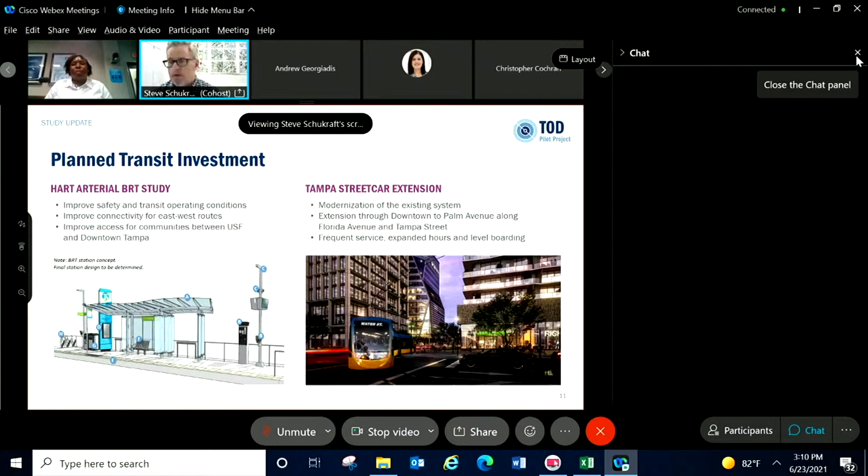So the fundamental question we're asking is, what does transit service mean for communities along the project corridor? When we talk about transit service, we're talking about two forms of transit service enhancement. One is the HART arterial BRT project, designed to improve the connection between downtown Tampa and USF by providing more frequent service, longer hours of service, and higher quality service along that corridor.

At the southern end of the corridor, in the core of downtown Tampa up to Tampa Heights, the transit overlaps with the arterial BRT and includes the Tampa Streetcar Extension project. The extension runs from the existing terminus at Fort Brooke Garage, north on Florida, south on Tampa, from Palm Avenue down to the existing system. So again, we're talking about frequent service, expanded hours, and high levels of accessibility to the system. This becomes, instead of a transit-served environment, really a transit-rich environment.

We're looking at and trying to understand better how to guide land use and development along that corridor. This map shows those locations. The yellow on the right-hand side is the existing streetcar line plus the extension up to Palm Avenue in Tampa Heights. The arterial BRT line is shown as the blue lines, with the circles indicating an early draft of the station location sites.

Running north on Florida, with the Tampa Pair south of Violet, and then Florida both directions up to Linebaugh, crossing to Nebraska, north on Nebraska to Fowler, east and west on Fowler to 30th, and then up to the VA, most likely with a turnaround at the University Area Transit Center. This stitches together the city's urban neighborhoods from downtown to Tampa Heights and Seminole Heights, to the older neighborhoods and commercial districts along North Florida, Nebraska, to Fowler Avenue, and to USF and the VA.

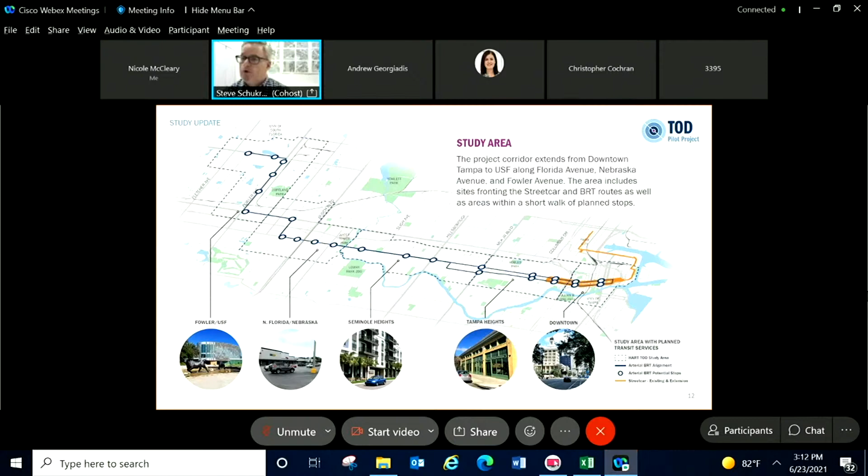And if you know what's happening up at the north end, there's a lot of development and investment in the pipeline, especially associated with the redevelopment of the University Mall site. The Rithm Project is going to completely transform the east end of Fowler, and we expect the market to improve significantly for similar kinds of more urban investments at the north end of the line.

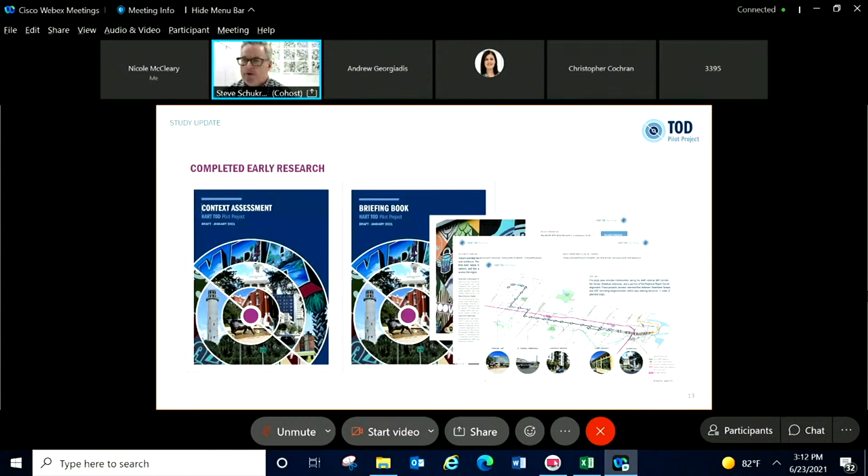So the research we've completed is a detailed context assessment looking at conditions along the full extent of the project corridor. Much of that is organized around reporting of conditions by sub-area, by the major neighborhoods I just talked about. We also have a briefing book, a summary document which rolls that up into a briefer statement about conditions along the project corridor and some of the key issues driving our thinking about policy and strategies.

And then the project shifts to Nebraska. Nebraska's conditions are somewhat similar to Tampa Heights and Seminole Heights. And then Fowler, we've got larger footprint commercial, some of that aging, some not performing terribly well and available for change. So if you think about it, we'll talk about the different kinds of opportunities: from urban infill downtown, to incremental infill and adaptive reuse in the center of the corridor, and then suburban retrofit as we move north, where we have more auto-oriented uses and larger footprint sites.

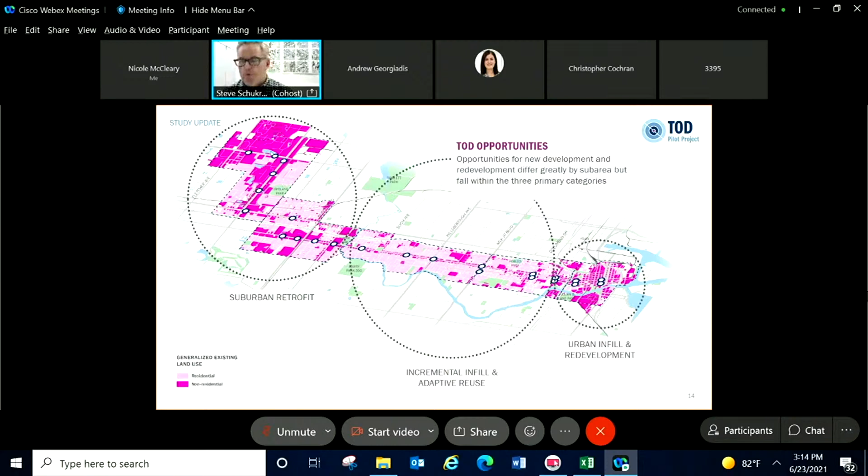So for the workshop, we went a little deeper into the existing conditions, but for today we wanted to get into the plan strategies. I'll present where we're headed with those around three big questions, and then open it up for discussion. We would like to spend the bulk of our time listening to you all.

So the three buckets of recommendations are organized around improving walking, biking, and access to transit, promoting housing affordability and diversity, and encouraging transit-oriented development and protecting neighborhood character.

So the first big question: how can we make it easier to walk and bike along the corridor and to transit stops? A transit trip begins and ends with a walk or bike trip, so walkability and bikeability is really fundamental to what we're thinking about.

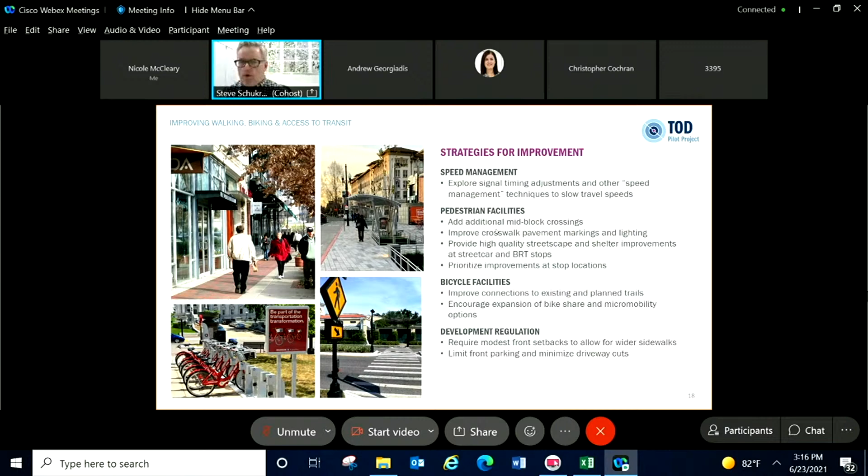On the affordable housing side of the equation, the question is, how can we protect existing housing affordability, encourage new affordable housing, and increase the diversity of housing options? So three basic dimensions to that question that we're focused on.

We're starting to develop a toolkit that describes the actions that would be appropriate. That's organized around five basic kinds of tools: housing programs, regulatory options, zoning tools, funding mechanisms, and capacity building. So we're starting to build out a set of recommendations around these basic ideas.

We've talked before on calls about the regulatory tools to streamline review processes, provide some regulatory relief in terms of limited parking, and also the potential for density bonuses to help support affordability. So that's just one of the five sets of recommendations we're focused on delivering.

And then the second part of that is the diversity of housing offered in the market that could be affordable or market rate. Right now, the market's delivering the two ends of the spectrum: single-family homes and larger scale apartments.

But there's a lot of missing middle housing types that aren't being delivered in the market, and we're trying to look at both what's driving that, what may be driving against delivering more diverse types, and if we can develop regulatory tools to try to promote that housing close to the corridor. So we're dealing with this from both an affordability and a diversity perspective in terms of housing.

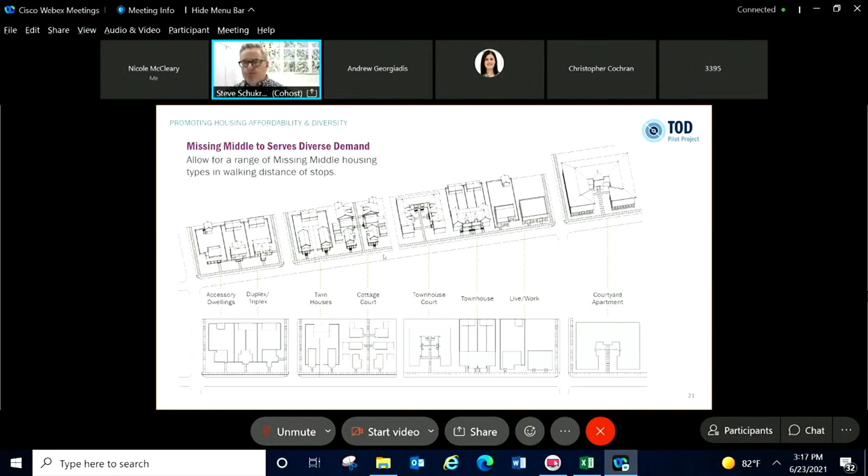The bulk of this presentation is going to be about encouraging transit-oriented development and protecting neighborhood character. So the big question is, how can we encourage development of underused and auto-oriented sites, bring new uses to the corridor, and ensure projects fit the surrounding community?

That project fit question is an important question because we've got single-family neighborhoods at various levels of stability right up against the project corridor, and we want to be really careful that what we do along the corridor supports goals for neighborhood stability, conservation, and improvement.

So the basic structure of the recommendations is organized around the definition of place types. Think of these as your future land use categories, a kind of replacement future land use category set - these would be the primary tools to guide development and redevelopment. They provide the foundation for comprehensive plan policies and eventually future zoning standards, including guidance about land use, but also about form, scale, and quality of development.

And we're thinking really carefully about how development along the corridor relates to the surrounding communities - thinking about transitions and buffers and scaling back what occurs up against the adjacent single-family communities.

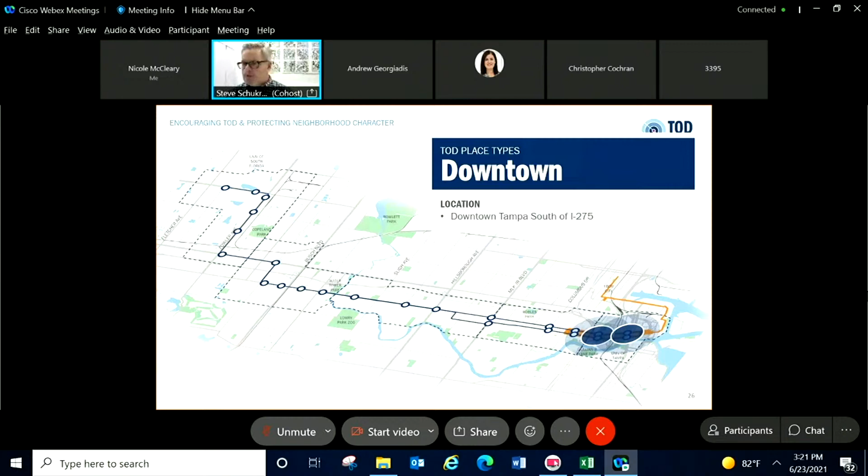So the first, downtown. This is a very small footprint affected by this recommendation. Downtown is already covered by zoning categories that have been improved over the last several years to address questions about frontage, orientation, and ground level use, and the Downtown Partnership and the city have been working on parking reform to make it easier to deliver more urban projects with less parking. So downtown somewhat takes care of itself, but we do need to look at how we can improve the existing regulatory framework to help make sure development supports transit in the best way possible.

Downtown is the most transit-rich place in the region. It has the ability to support significant intensification of use. If you think about downtown, the street network is basically set, so there's not going to be more roadway capacity, but there are better ways to use that roadway capacity or street space to move people, and that's through the delivery of enhanced transit options, which is what the streetcar project and arterial BRT project are all about.

Downtown is a place with tall buildings, primarily served by structured parking, active storefronts and streetscapes, and the city has made significant investment over the last several years to improve walkability and streetscape conditions.

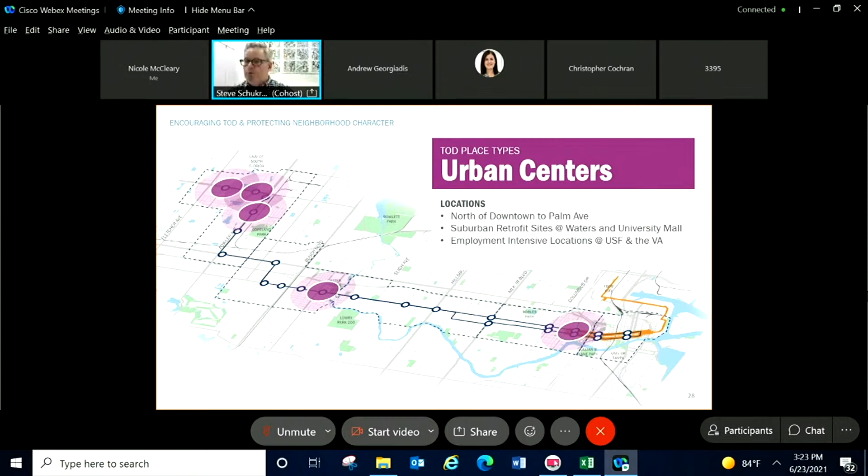These categories would allow for a broader range of uses if the institutions wish to go that way, but the idea is that there are just a few pulse points of more intense activity in a couple of locations.

What we're talking about here are mid-rise buildings with active ground floor uses. These would be community centers or sub-regional centers for commercial activity, higher density housing, education, and employment. We see these as being very urban in form, with buildings lining the perimeter of blocks, parking tucked in the middle, and a real focus on active ground floor uses and active streetscapes.

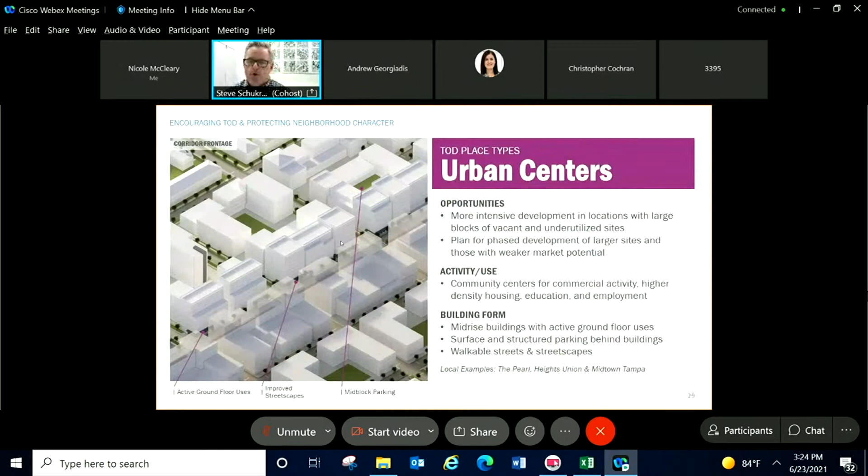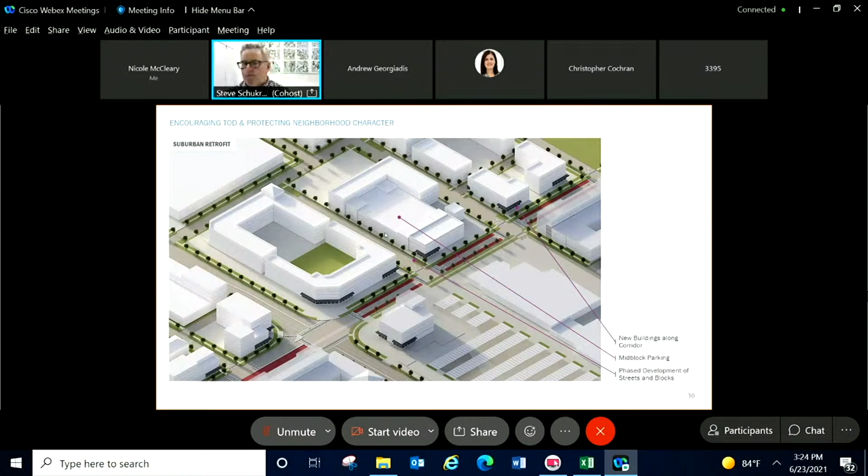This sketch shows a general location along the corridor: North Florida Avenue, north of the river. This imagines those large footprint retail sites starting to redevelop in a more urban and walkable form. We're starting to think about how improvements on those sites could be phased, how early phasing could be more walkable and more transit supportive, and allow for build-out over time of a more urban pattern of development. The character of urban centers is like you'd see in any good quality walkable urban environment.

The focus is on developing code recommendations and plan recommendations centered on the quality of the ground floor frontage of those buildings, lining quality streets and public spaces.

The TOD centers are the next scale down, and it's a bit of what's emerging in a few locations along the corridor now. If you think about what's happening south of Hillsborough Avenue on Florida, that's kind of emerging as a neighborhood center of activity.

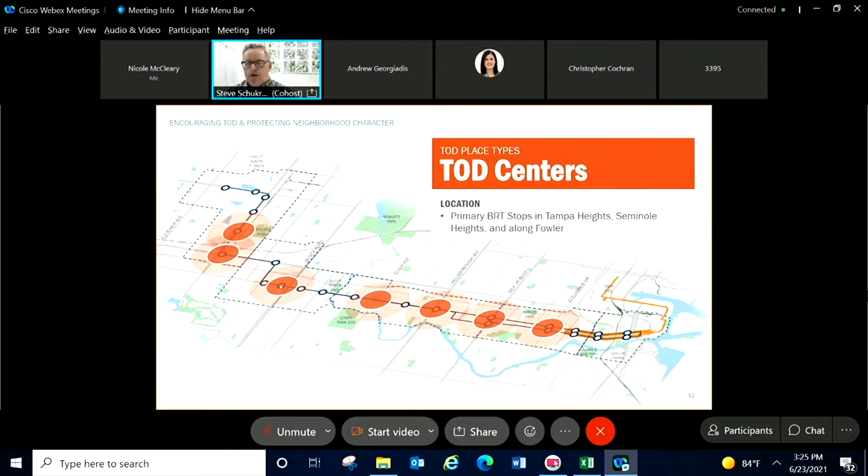There's been a couple projects that represent the general scale of development that we believe is appropriate for key locations along the corridor. So we're talking generally about the vicinity of Columbus, the crossings of Columbus, MLK, Hillsborough, Sligh, north of Busch Boulevard—this could be the potential redevelopment of the Floriland Mall site—and then at Nebraska, Fowler, and at 15th and Fowler.

So these are 3 to 5 story buildings, relatively dense, but not nearly the scale or footprint of what you would see in the downtown or urban center place.

The scale of that development is going to be influenced by the scale of sites available for redevelopment, so there's sort of a natural lid on how large these developments could be. We're also looking at transitional development that tapers down to the neighborhoods, so the introduction of missing middle housing types adjacent to the single-family neighborhoods off the corridor.

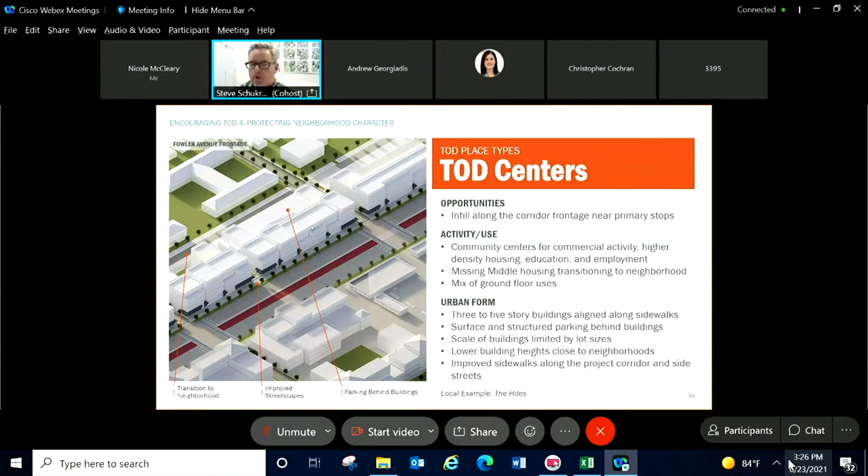The TOD center kind of development, like all of what we're talking about, really focuses on delivering quality streetscapes and public spaces, very walkable environments, easy to get to from the neighborhood, delivering additional alternative kinds of housing to support demand along the project corridor.

Really thinking carefully about how we get better streetscape conditions. This is The Hites—one of the patches of frontage along the Florida corridor—where we've got an example of how you can improve streetscape conditions with a relatively modest building setback and the right rules in place to guide design decisions.

The TOD corridors are the locations between the centers, and so this is a slightly smaller scale of development, up to 4 stories, still allowing for a mix of uses, still addressing the transition back to surrounding neighborhoods.

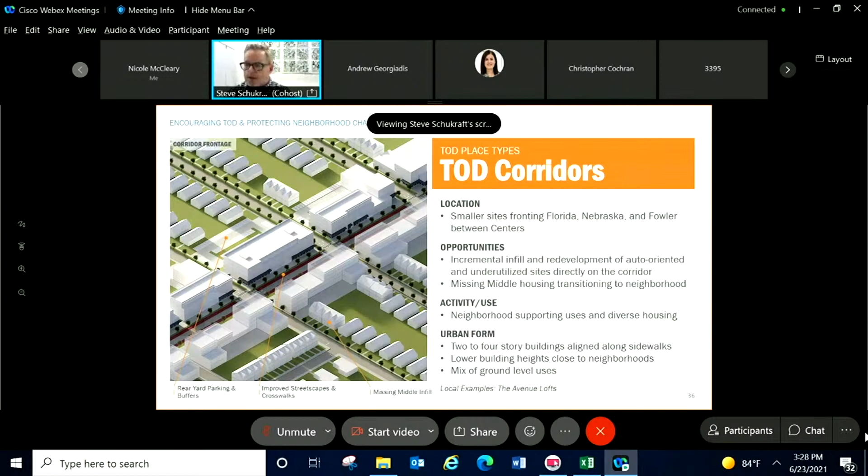The scale is more neighborhood scale, 2 to 4 story building types, with very similar conditions on the streetscape as across the corridor. So walkability is a fundamental goal for each of the types, and recommendations will address that in the comprehensive plan recommendations as well as in code recommendations.

And in the neighborhoods, we're talking about fairly modest scale infill and redevelopment close to the corridor that would introduce some new housing types, either small lot single family, some attached housing, and possibly small apartments.

I know there's sensitivity about the appropriate level of change in the surrounding neighborhoods, and so we would expect to get some dialogue going about this pretty soon. But the idea is that where we're delivering this enhanced transit, we can also promote neighborhood stability with the introduction of some additional types of housing to increase diversity.

So this is the structure that we're starting to advance the details of. We're starting to map the locations of these more carefully—developing a map set now that shows exactly how far, parcel by parcel, block by block, each of these designations goes, and how that relates to the surrounding neighborhoods. You'll be able to see specifically when we release those maps in the next few weeks how we're mapping this category and how that can influence the development pattern.

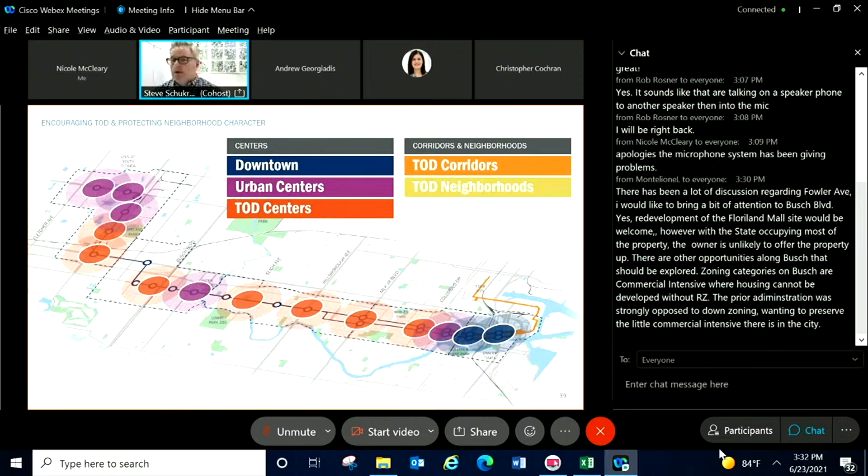The Floriland Mall site represents other challenges too. Portions of that have been sold off, so it's not just in the state's hands, there's private ownership of that whole parcel as well. One of the problems with mall sites is they tend to sell off the boxes over time, and ownership gets fragmented.

I think there's a fair debate about where to focus. Our sense is that the Floriland Mall site is not performing as strongly as the big box to the south, so we thought that would be the more appropriate place to identify a center. We don't believe that's going to happen anytime soon, the market isn't very strong right there to drive significant investment. We think there's other sites that are going to capture investment sooner than that.

The other thing is that commercial intensive category, we wouldn't consider adding the potential for residential development as a downzoning, we think that's providing more opportunities for change of those properties over time. So what we're trying to do is open up the possibility for these places that are specifically aligned with transit service, because both population and employment intensity is important to build the base of ridership and help justify and support the investment. We don't necessarily favor employment intensive over residential intensive land uses, because both categories along the full project corridor help support ridership. The more we can get population and employment aligned to the corridor, the more likely it is that people are going to use the transit, and we can support that investment over the long haul.

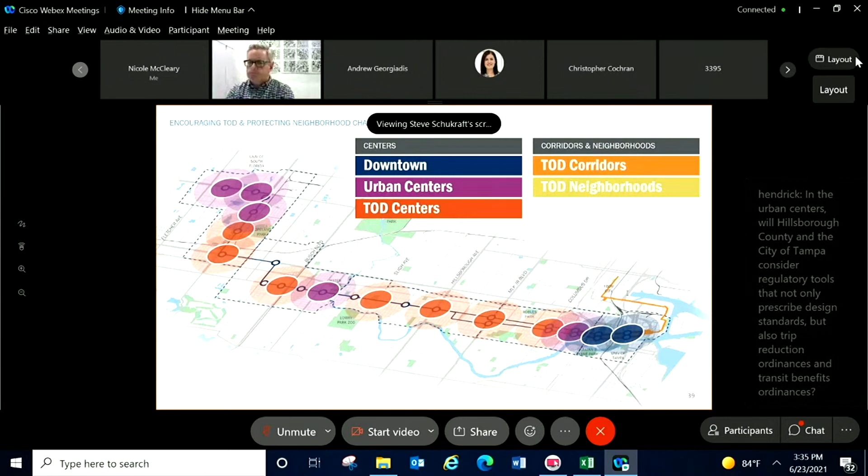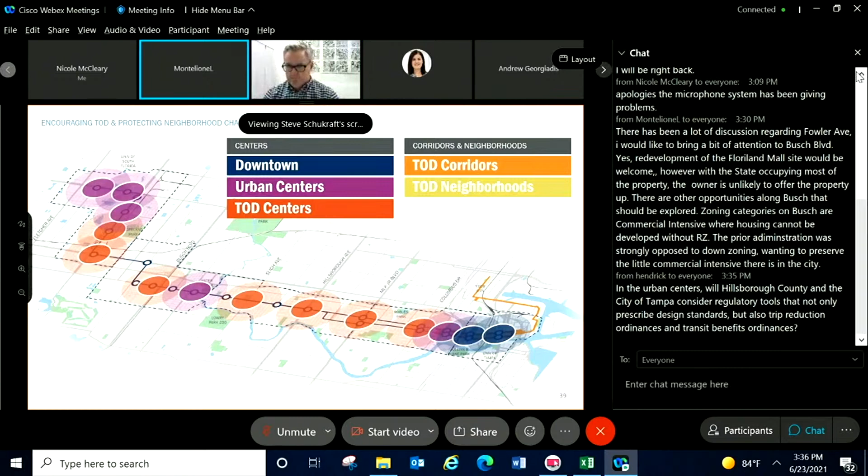Steve, this is Lisa Monteleone, and I have been on the board of my civic association off and on for probably 20 years, and I've lived in the area, either in my current location, which is in the Terrace Park neighborhood, between Busch and Fowler, just west of the Temple Terrace city line, and it goes all the way up to 30th Street. The adjoining neighborhood, from 30th Street to Nebraska, is known as the University Square Civic Association, not to be confused with the university area. They picked that name probably 50 or so years ago because a lot of USF professors used to live there before Tampa Palms and North Tampa was really developed.

So more than 50 years probably. And you mentioned, and I put this in the comments, you mentioned the redevelopment of the Floriland site.

I had some interaction with the owner years ago of that mall property that includes the out parcels, and they weren't very welcome to any suggestions about rehabbing or utilizing some of their property for other means. They have the state contract in there with CareerSource, so they're unlikely to want to do anything with that property. And when I say interactions, it was personal. My boyfriend is a contractor, and it had to do with renovations to the building and interior, because the roof was leaking so bad he refused to replace the roof.

But that aside, there are a lot of properties along Busch Boulevard that I'd like to talk about and see redeveloped, because Fowler has been developed over a period of time and it's aesthetically pleasing. It is definitely not bikeable or walkable, in my opinion, given the speed of traffic on both Busch and Fowler. The sidewalks on Fowler are a little bit better than they are on Busch, but not a lot. But Busch is horrible. I mean, the sidewalks are 3 feet in places, or non-existent in others.

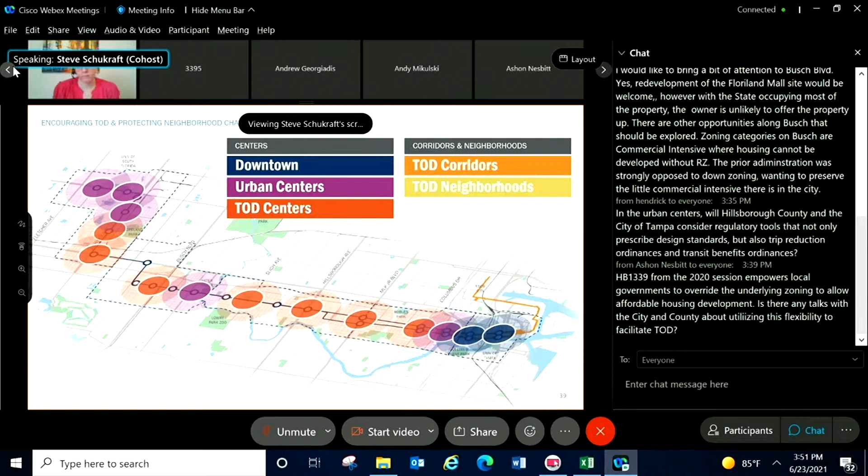We could talk a bit more about places like a CI zone, overriding it for affordable housing, but then providing a TOD alternative path that would get you additional density and intensity. What we're trying to calibrate is which of these benefits or increases in density and intensity would be available to every development, and which would be available only to affordable projects, so we can maintain the incentive for affordable projects over all projects.

If we looked at it purely from a ridership standpoint, we'd like to see more people along the corridor to support ridership. But the region needs more affordable housing, so we might need to tip the scales a bit to support those affordable projects, and not allow everyone to access the highest densities and intensities for market rate projects. It's a really critical question. We're just starting to get into that discussion about the right tools and how to calibrate them, but that's definitely part of the overall dialogue.

Hi Steve, could I jump in as well? Sure. Hi everyone, Caitlin Johnson with SB Friedman. We've been leading the strategy development related to affordable housing.

Just to piggyback on that response, we've been conducting interviews with the city of Tampa as well as folks with Hillsborough County related to current use of tools, policies, and strategies to help inform this best practice toolkit that Steve introduced earlier in the presentation. We've talked about HB 1339 with both the city and the county to understand their current thinking about using this. It's still so new, about how you can structure the program, what that looks like. So it's our understanding that the city's been exploring it a little bit.

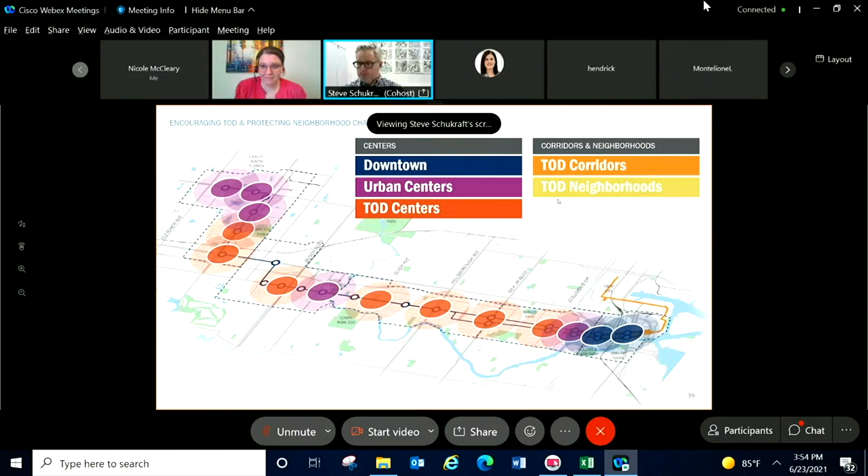Thanks, Caitlin. And just a comment from Lisa, FYI, Hillsborough County offers HART Flamingo passes at 75% off to employees. Thanks, Lisa, that's good to know.

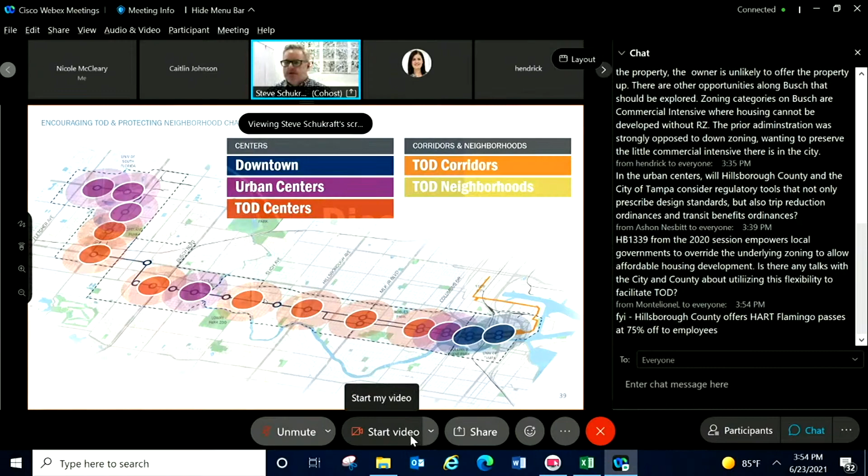We have a quiet group today. Anyone else have any comments or hands raised, or want to unmute and jump in? Let me give folks time to think about that for a second. I'm going to go ahead and skip up to the next step slide.

This may trigger some additional discussion. We did our public workshops. HART did a significant blast to their email list and social media, but we're still encouraging folks to jump on the project website and complete a survey. We've got some basic questions about the future of communities along the corridor that's going to be up for another week.

Michelle, do I have this right? Does it close on Friday? Yes, that's correct, Steve, it closes on Friday.

I think we discussed that. I'm not sure if we want to leave it open a little bit longer after this. Yeah, we might leave it open for another week. There's really no particular pressure on that closing date. We can take feedback for a bit longer, but we do want to help drive people to that as we're starting to put the policy recommendations together.

So we're in the process of refining strategies and recommendations. As Caitlin said, SB Friedman is helping us with the housing affordability focused recommendations. So that's looking at both the production of new affordable units as well as the protection of naturally occurring affordable units in neighborhoods. So that process is underway.

Plus Urbia, the urban design firm that's on the team, is helping us start to develop the regulatory framework, so the recommendations about the standards for development that would apply by place type along the project corridor.